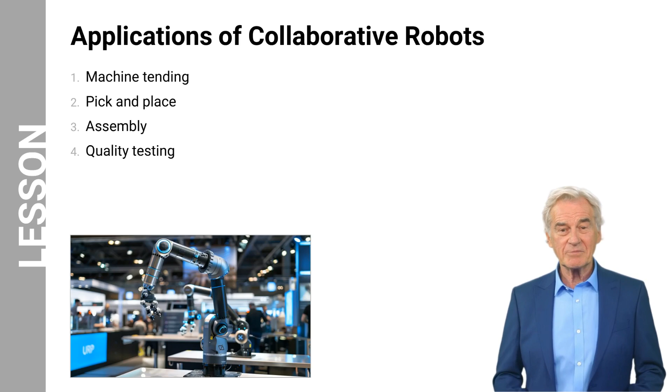Let us look at the first application, machine tending. So, what is machine tending? Machine tending is the process of loading and unloading parts or materials into machines, typically as part of manufacturing and production operations.

In this process, either a robot or human operator places raw materials into a machine, such as a CNC machine. The operator or robot then oversees the machine's operation to ensure everything runs smoothly. Once the machining process is complete, they remove the finished part from the machine.

Machine tending has become one of the most popular applications in manufacturing automation due to its ability to streamline production processes and reduce manual labor requirements.

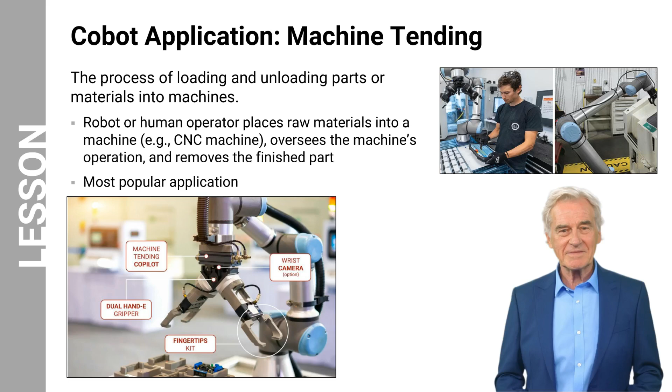In machine tending applications, the robot is responsible for handling various repetitive tasks throughout the production process. The robot loads raw materials into the manufacturing machines. During operation, it monitors the machine's performance to ensure proper functioning. Once the manufacturing process is complete, the robot removes the finished parts from the machine.

The robot also performs basic quality inspection of the manufactured parts to ensure they meet specifications. It also handles the movement of parts between multiple machines when sequential operations are required. The robot manages the organization of finished products by stacking or arranging them in designated areas.

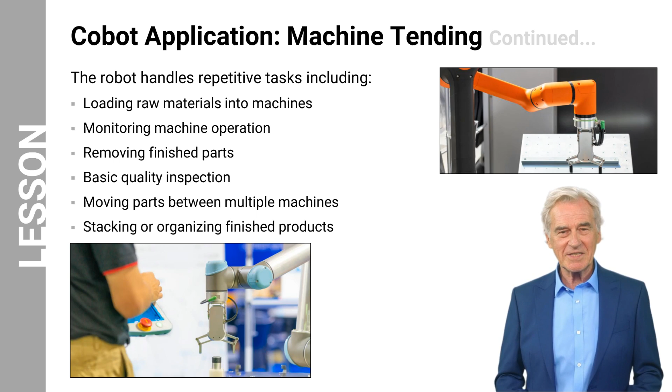Let us look at some of the benefits of machine tending in manufacturing operations. By automating the loading and unloading process, it significantly decreases non-value-added work that would otherwise be performed by human operators. The robotic system can perform these repetitive tasks endlessly without fatigue, maintaining consistent performance throughout production shifts.

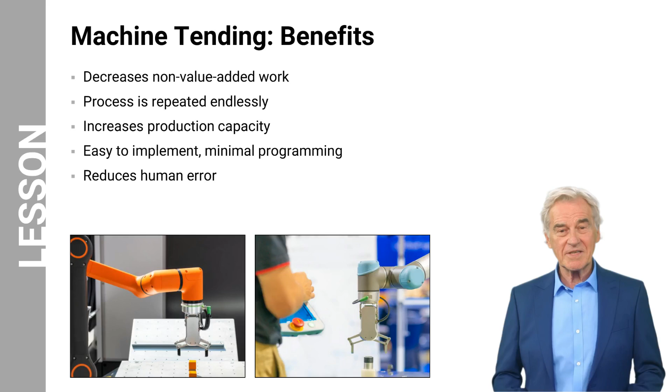This automation leads to increased production capacity as the robot can operate continuously with minimal downtime. The implementation of machine tending systems is relatively straightforward, requiring minimal programming effort to set up and operate. The precision and reliability of robotic systems help reduce human errors that could occur during manual loading and unloading operations, leading to improved product quality and reduced waste.

The next application where cobots are utilized is picking and placing tasks. So, what is pick and place? Pick and place is a process that involves the robot moving objects from one area of its workspace to another.

This application is fundamental in many manufacturing and logistics operations. The robot identifies, grasps, and transfers items between designated locations in its work envelope. The pick and place operation performs optimally when dealing with well-ordered objects that have similar shapes and sizes. This standardization helps simplify the programming and ensures reliable operation.

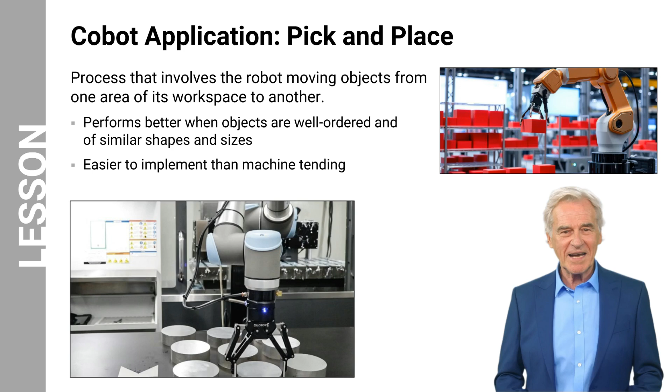Pick-and-place applications are generally easier to implement compared to machine tending tasks. The simpler programming requirements and more straightforward motion sequences make it an ideal starting point for facilities new to robotic automation.

Here's a hypothetical case study of a collaborative robot system implementation from EV manufacturing. An electric vehicle manufacturer faced challenges with manual battery cell placement, creating production bottlenecks and quality inconsistencies. With a target to increase production by 40% within 18 months, they implemented a collaborative robot equipped with a vision system and custom end effector capable of handling multiple cell formats.

The design specifications required precise cell placement with a plus or minus 0.1 mm accuracy while maintaining the existing factory footprint. The cobot system needed to seamlessly integrate with current battery testing systems and demonstrate flexibility in handling multiple cell formats.

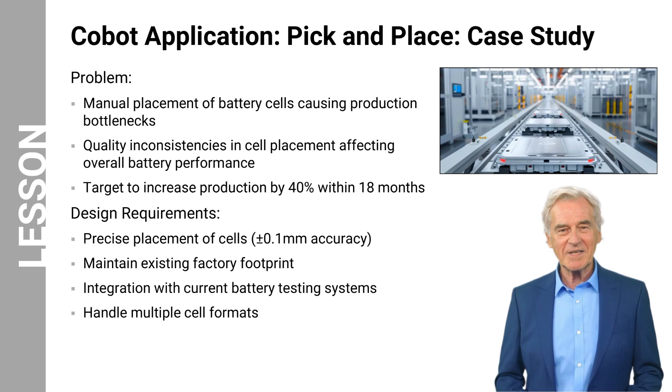The manufacturer implemented a cobot solution featuring a vision system and custom-designed end effector capable of handling various cell sizes. The system incorporated force-torque sensing for precise insertion and integrated quality inspection during the placement process.

The results exceeded expectations, achieving a 45% increase in production rate and 99.9% placement accuracy. The implementation maintained workplace safety with zero incidents, and the system achieved a return on investment in just 14 months.

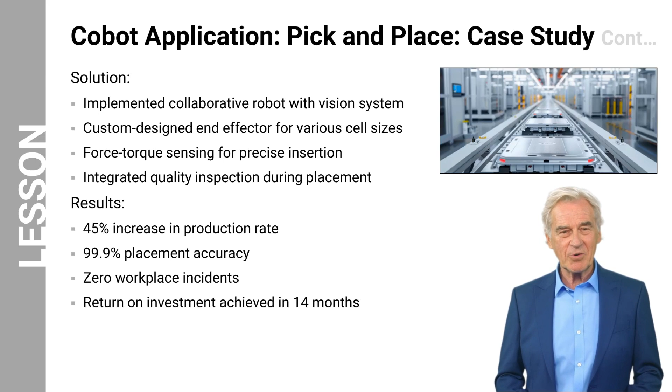The next cobot application to consider is assembly, which is a process where robots perform tasks such as putting together various components to create the final product.

During assembly operations, cobots follow programmed sequences to combine different components into finished products. The robot executes precise movements to fit, join, and secure parts according to the assembly requirements. This automated approach ensures consistent assembly quality and reduces the physical strain on human workers who would otherwise perform these repetitive tasks.

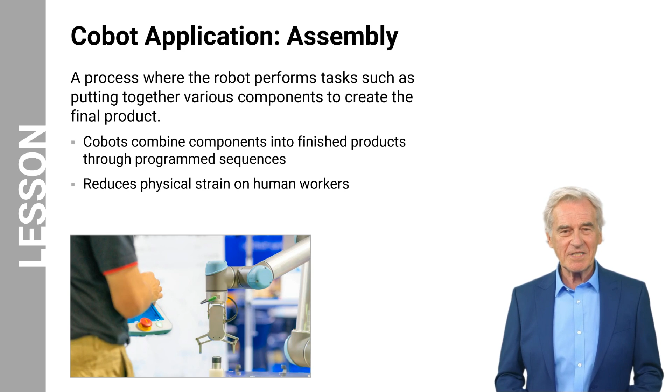Cobots are designed to handle simple to moderate assembly tasks when equipped with appropriate sensors and end effectors. In this collaborative setup, cobots manage the repetitive assembly operations while human workers focus on more complex tasks that require advanced decision-making and dexterity. A key advantage of cobots in assembly is their ability to work safely alongside humans in shared assembly spaces, creating an effective human-robot collaboration environment that could maximize productivity while maintaining workplace safety.

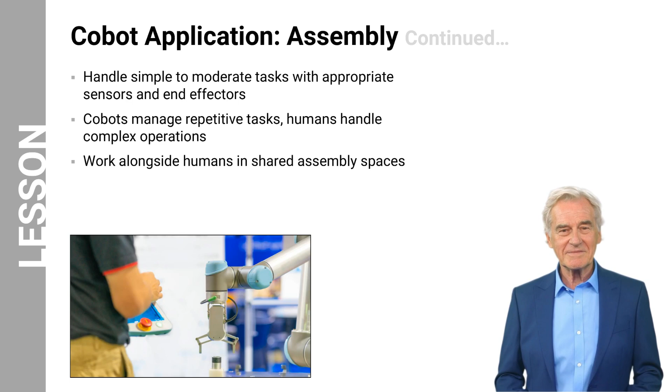Quality testing involves cobots performing repetitive inspection tasks, using sensors and vision systems while collecting data, enabling human operators to focus on complex quality decisions requiring judgment and expertise.

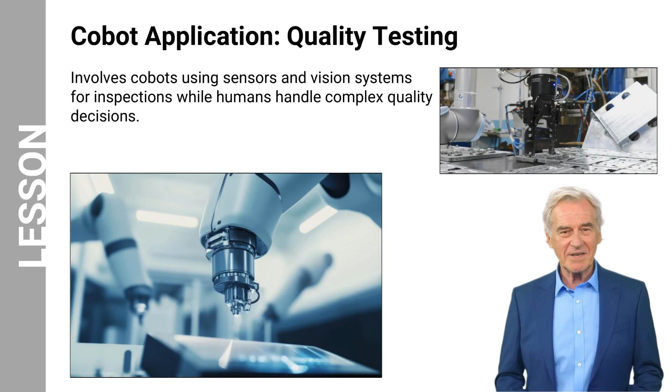Visual inspection utilizes cameras and sensors to detect defects and measure precise dimensions of manufactured parts. In force testing applications, cobots employ force torque sensors to verify assembly integrity through accurate measurements. The robots excel at performing repeatable tests while automatically documenting data for quality control records.

This hybrid testing approach allows cobots to handle routine quality checks efficiently, while human operators focus on analyzing more complex quality factors that require advanced judgment and experience.

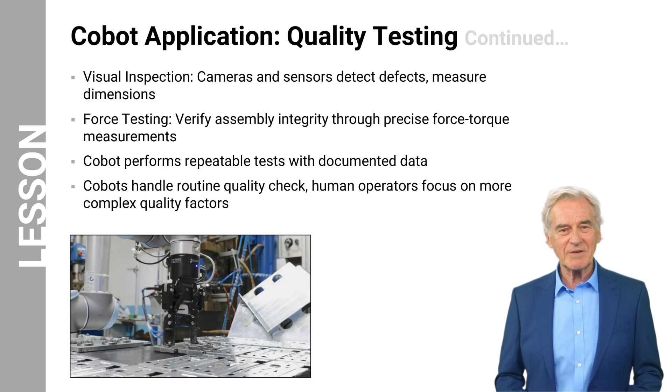An example of cobots assisting with quality testing in automotive manufacturing is performing standardized force tests on automotive switches. The cobot applies consistent pressure and records precise measurements for each test.

While the robot handles these objective, quantifiable measurements, human operators work alongside to conduct subjective quality assessments. The human workers evaluate qualitative aspects such as the feel of the switch operation and analyze sound quality. This division of tasks leverages both the cobot's precision in repetitive measurements and the human's sensory capabilities for qualitative evaluation.

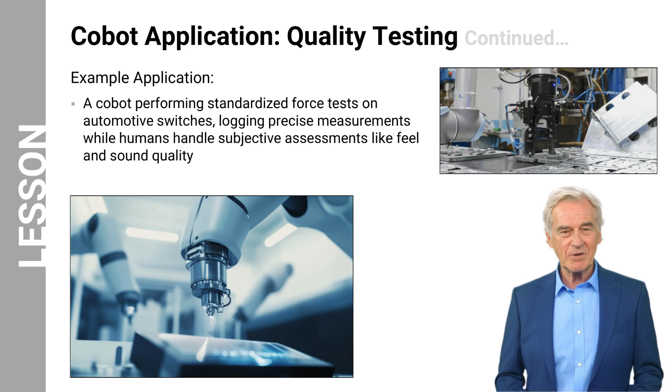In summary, collaborative robots have several applications in modern manufacturing and industrial settings. These robotic arms are engineered to operate safely in shared workspaces with human workers, enabling true human-robot collaboration. They excel at machine-tending operations, automating the repetitive work of loading and unloading various equipment.

The robots also handle basic pick-and-place tasks, moving objects between locations with precision and consistency. In assembly applications, they support human operators by taking on simple, low-dexterity tasks, allowing workers to focus on more complex aspects of the assembly process.

These robots contribute to quality control through integrated sensors and vision systems that perform automated inspections, while human workers retain control over more complex quality decisions. Thank you.